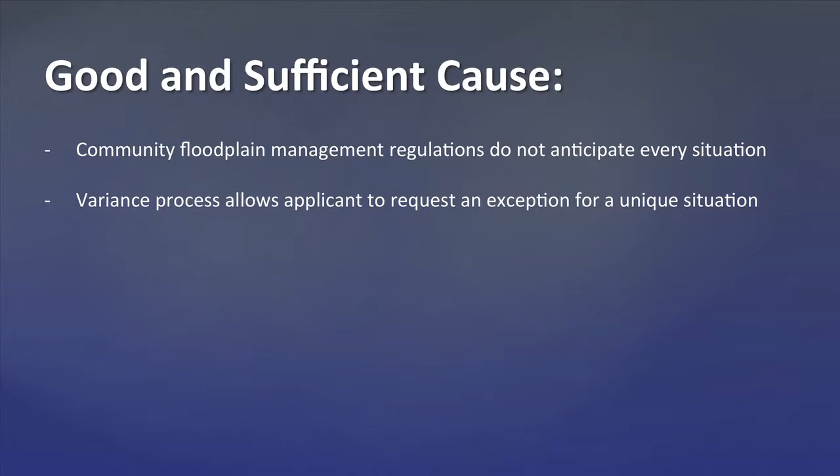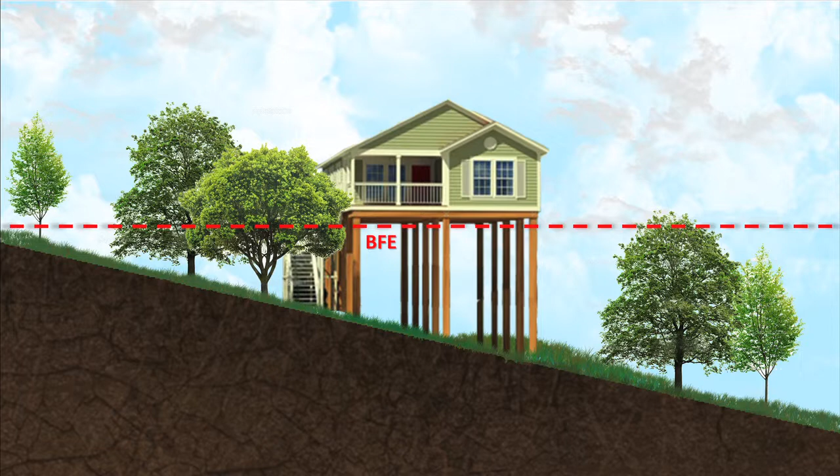The community's floodplain management regulations do not anticipate every imaginable situation, and so the variance process allows an applicant to request an exception for a unique situation. However, the variance must pertain to the land itself, not to the structure, its inhabitants, or the property owner, and should not be granted for an issue that can be resolved through other means, even if the alternative is more expensive.

A variance should only be granted in situations where a property has physical characteristics so unusual that complying with the ordinance would create an exceptional hardship on the applicant. Those characteristics should be unique to that property and not be shared by adjacent parcels.

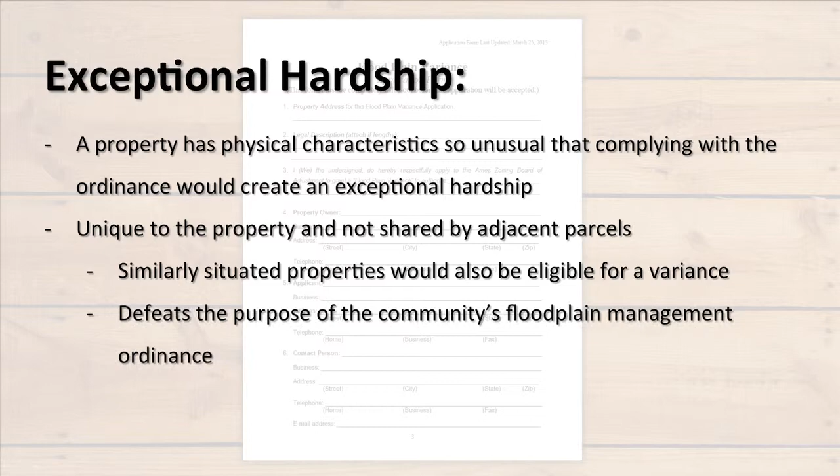Otherwise, similarly situated properties would also be eligible for a variance, which defeats the purpose of the community's floodplain management ordinance. Again, the unique characteristics must pertain to the land itself, not the structure, its inhabitants, or the property owner.

The hardship that will result from failure to grant the requested variance must be exceptional, unusual, and peculiar to the property involved. Economic or financial hardship, inconvenience, aesthetics, physical handicaps, or personal preferences cannot, as a rule, qualify as exceptional hardships.

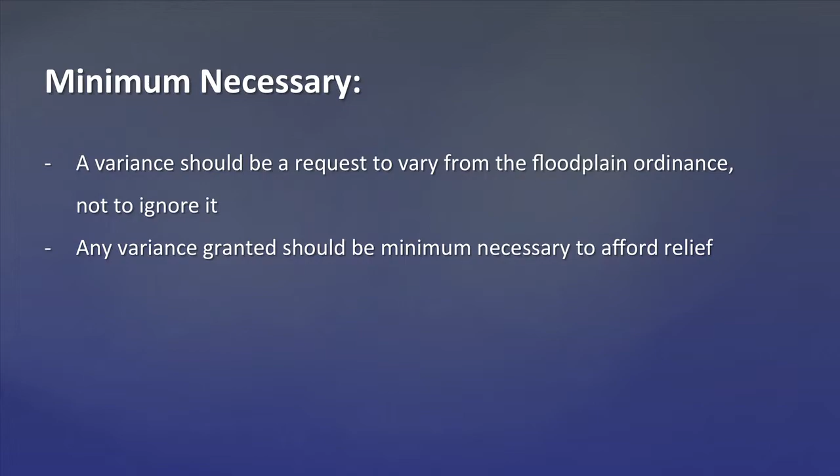A variance should be a request to vary from the requirements of the community's floodplain ordinance, not to ignore them. For this reason, any variance granted should allow only the minimum necessary deviation from the normal requirements.

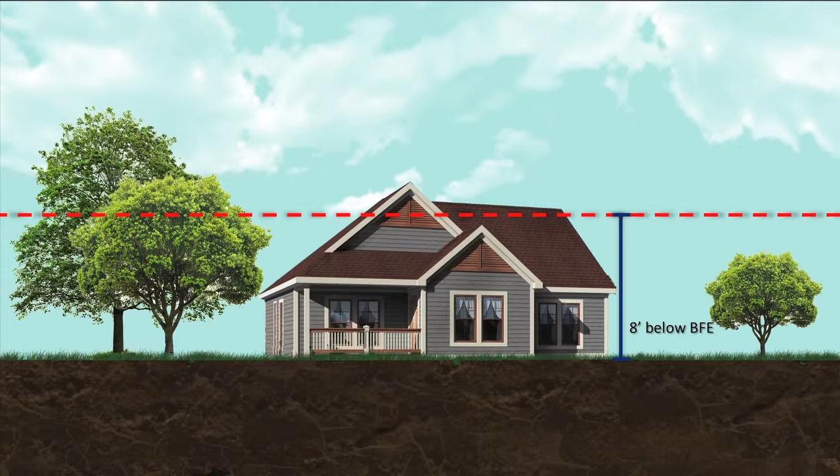In the case of a request for a variance from building elevation requirements, this would mean that the variance would not grant permission to construct the lowest floor at grade, but to the level that both provides relief for the applicant while still preserving the integrity of the floodplain ordinance.

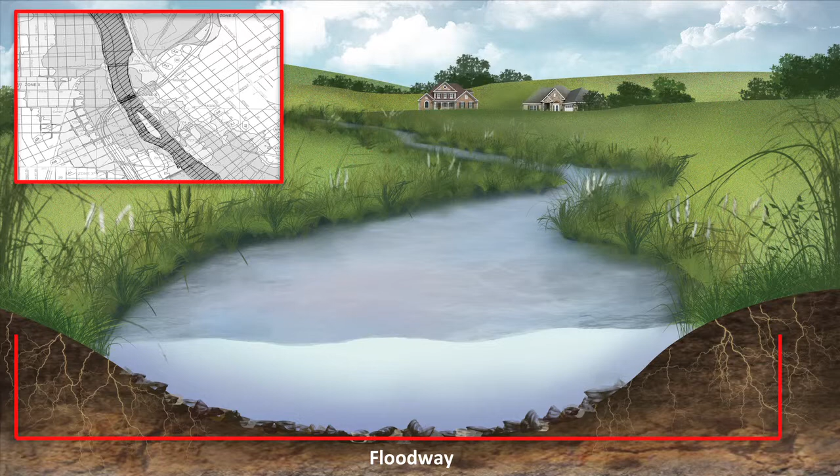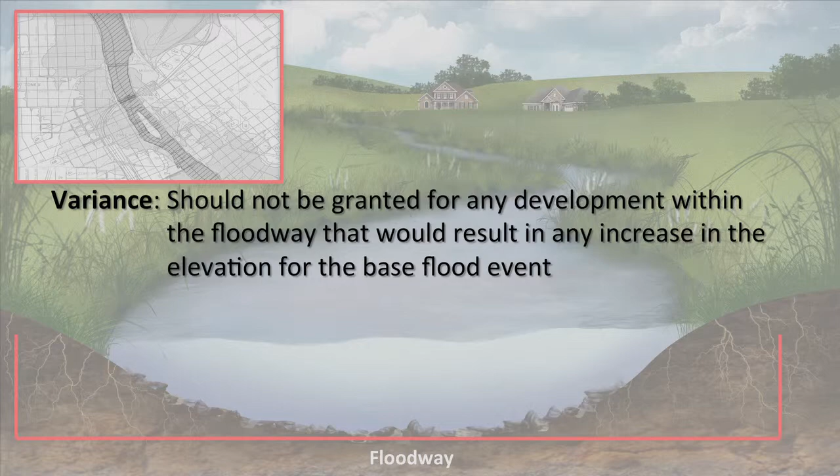There are additional considerations associated with variance requests for development located in the floodway. Variances should not be granted for any development within the floodway that would result in any increase in the elevation for the base flood event.

Unusual and peculiar physical characteristics of a property may provide instances under which a local community could justify granting a variance request. Some of those physical characteristics of a property may include an irregularly shaped lot, a parcel with unstable soils, or a parcel with unusual geologic conditions below ground.

The following are examples of when a variance from the building elevation requirements would not be justified. When the property owner cannot afford to comply with the regulations. When the elevated building will look different from the others in the neighborhood, or when the owner cannot climb up steps into an elevated building or addition.

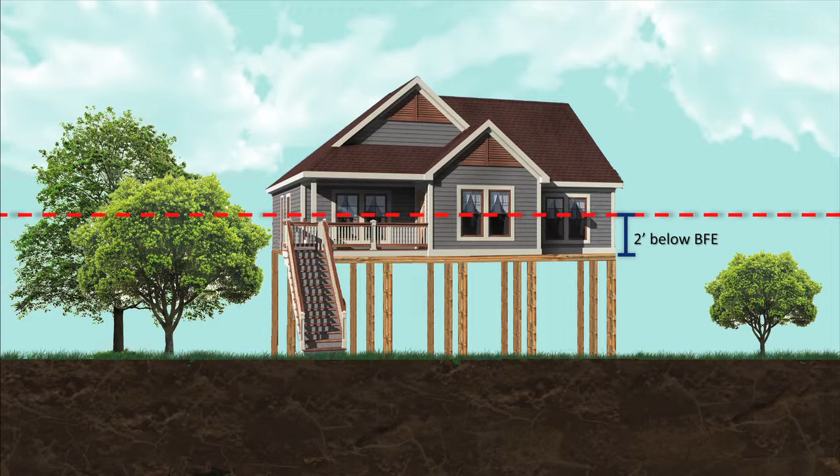A variance granted by a community from the building elevation requirements of its floodplain ordinance will not affect the methods used to determine flood insurance rates. And the increased risk associated with a non-compliant structure will be reflected in higher annual flood insurance premiums.

For this reason, whenever the community grants a variance from the normal building elevation requirements, it should inform the property owner that the building will be subject to increased flood insurance rates that could potentially be as high as $25 per $100 in coverage. The granting of variances from the community's floodplain ordinance should be a rare occurrence.

If FEMA discovers that a community is routinely granting variances that are inconsistent with the objectives of its floodplain ordinance and the NFIP, the community can be subject to probation or suspension from the NFIP.

Today, you have learned about the process for seeking variances from local floodplain regulations and considerations for when a variance should be granted by a local community.